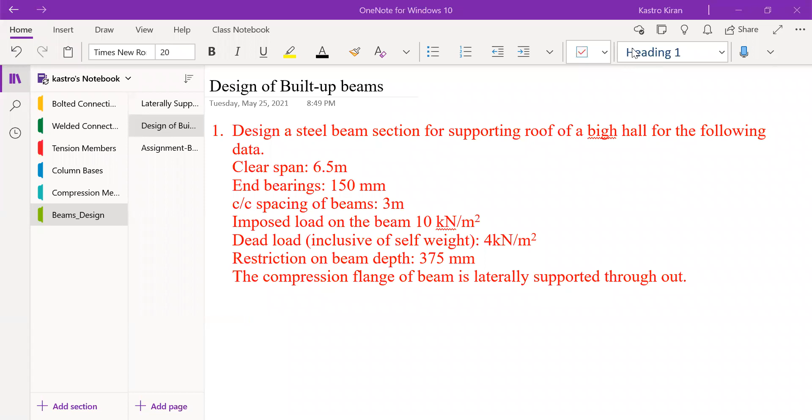So in today's class, we'll be talking about the design of built-up beams. So you all are aware of what is a built-up beam. A built-up beam is a beam.

Suppose you have a general rolled steel I section, and if you want to increase the strength carrying capacity of the same section, you provide certain plates on the top and at the bottom, depending upon the requirement. So depending upon the requirement, you place the plates on the top, at the bottom, or on both sides of the flanges. That kind of section is called a built-up section. So this is one of the cases where you can use built-up sections.

The other case of using built-up sections is when the depth of the beam is restricted. Suppose you should not make the depth of the beam more than 500 mm, let us consider this example. If the depth of the beam should not exceed 500 mm, then within that 500 mm depth only, you have to make sure the given I section carries enough load. These are the two possible cases where you can use built-up sections.

The first case is if you want to additionally ensure the safety of the member by providing plates on the top flange and bottom flange, you use built-up sections. Whereas the second case is if the depth of the beam is restricted. If in the question, or in a real-time scenario, someone says you have to design a steel beam but the depth should not exceed 500 mm, then you also ensure the safety of the member by providing built-up sections. So these are the two possible cases where you can use built-up sections.

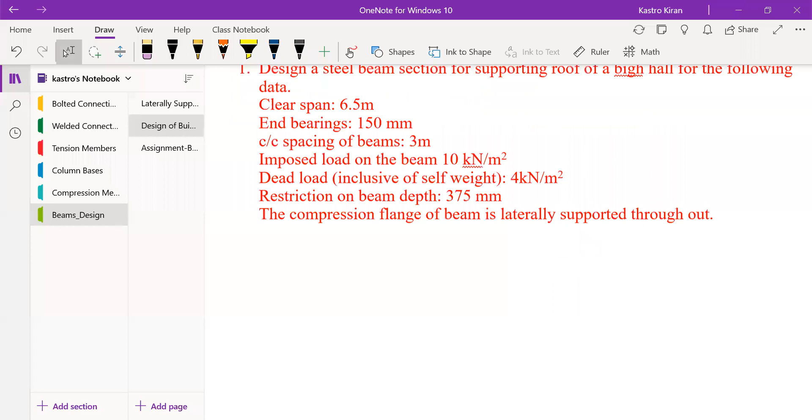Let us see how to design a built-up section when the first or second case is given. The design procedure doesn't change, but the pattern of solving will change in one step. Anyway, let's look at this first model problem on design of built-up sections or built-up beams.

The question goes this way: design a steel beam section for supporting the roof of a big hall for the following data. They have clearly given the clear span as 6.5 meters, the end bearing width as 150 mm, the center to center spacing of beams as 3 meters, the imposed load on the beam as 10 kilonewtons per square meter, and dead load, inclusive of self-weight, as 4 kilonewtons per square meter.

And here you can see the restriction on beam depth. If you are designing a beam, the total height should not exceed 375 mm, so it must be less than 375 mm. That's the condition. So the restriction on beam depth means you have an I section.

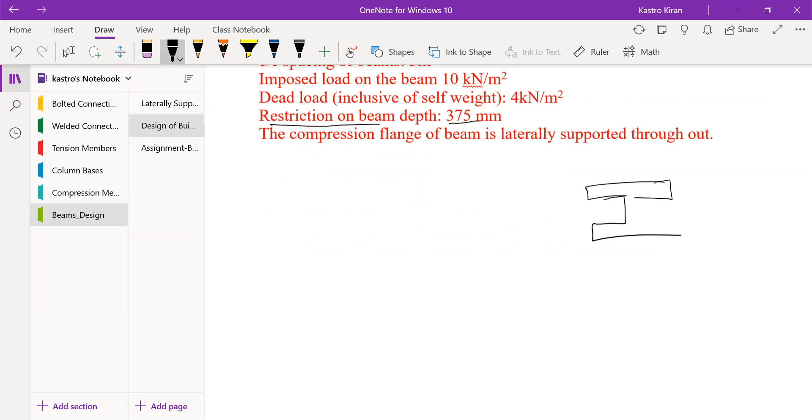When you are selecting an I section based on the ZPZ value, remember the section you select based on ZPZ should not... suppose, for example, you are selecting ISWB, and let's say you got the ZPZ value as some X value. You found that among ISWB sections, this X ZPZ value occurs at, say, ISWB 400. ISWB 400 represents a ZPZ value greater than X.

But what is the condition saying? The condition says you should not select the depth or height of the beam greater than 375 mm. That means, here you are selecting ISWB 400, which satisfies the ZPZ condition, but the condition says the beam depth or total height should not be greater than 375 mm. So you are not supposed to select this section. You are supposed to select a section with a depth less than 375 mm. That means you can go for ISWB 350 or ISWB 300.

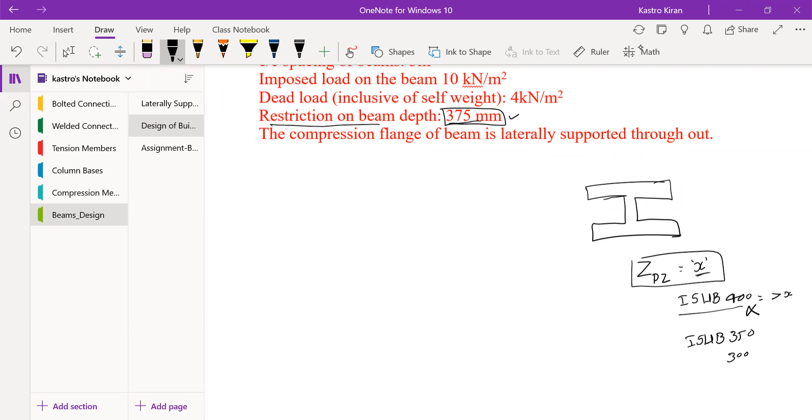Likewise, now you have another pattern of solving this problem. This is just a rough idea of how to solve this kind of problem.

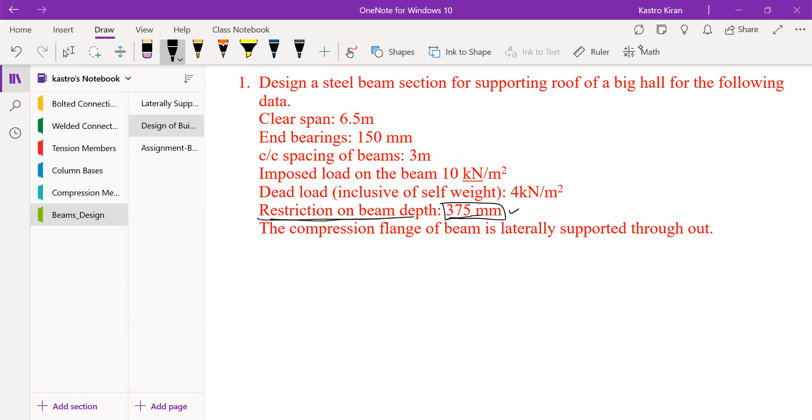If you observe the question very clearly, they did not mention anywhere that you should design a built-up beam. Instead, they have given a condition which directly indicates the design of a built-up section or built-up beam. So there's no compulsory rule that they will always say design a built-up beam section. They can come in an indirect way of asking you to design a built-up beam.

So if you find this kind of pattern in the exam, that is the restriction of beam depth, or the depth of the beam is restricted to so and so value, then that means it's a built-up beam. How to solve this, I'll let you know.

So this is the data which they have provided, and here it is also a laterally supported beam. We know we have been talking about two types of beams: laterally supported beam and laterally unsupported beam. Laterally supported beam is also called laterally restrained beam, and laterally unsupported beam is called laterally unrestrained beam. We have been talking about only this model of problem since it is limited to your curriculum.

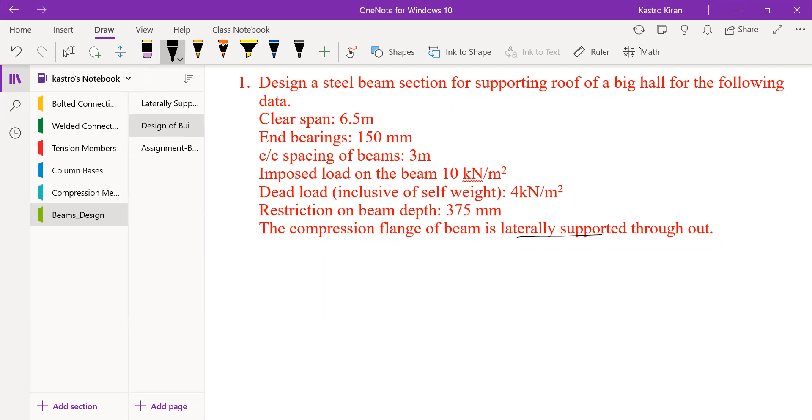So let's solve this problem, the design of built-up beams. Before solving, let's write the given data, and then we'll go for the solving process.

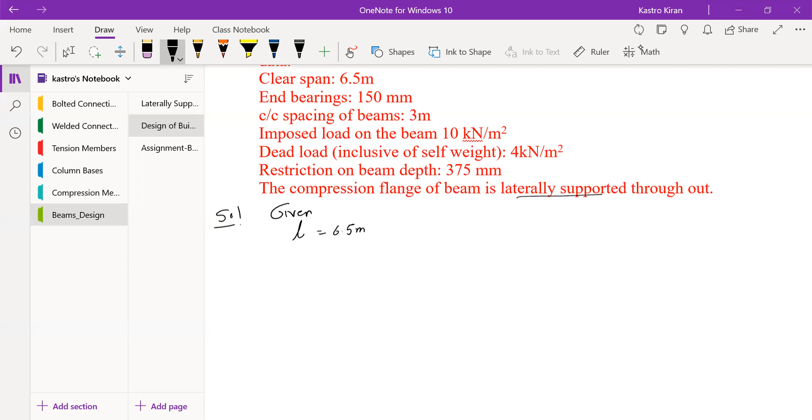Given, the clear span is L equals to 6.5 meters. Remember, here it is a clear span, not the effective span. And they have also given the end bearings width. So what is the width of end bearings?

It is 150 mm, and imposed load on the beam is also given, which is 10 kilonewtons per square meter. Remember, imposed load is also called live load. Don't confuse here. Imposed load on the beam is 10 kilonewtons per square meter.

And the dead load is also given, which is inclusive of self weight. Remember, we solved one problem earlier where they said exclusive of self weight. At that time, you assumed certain self weight, that is 1.037, and then multiplied with factor of safety and added to the total load. But since they have said very clearly that it is inclusive of self weight, you don't need to assume the self weight of the beam. Remember that condition.

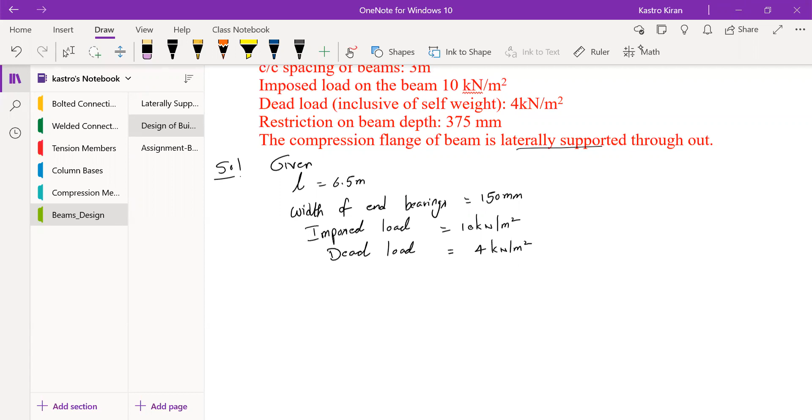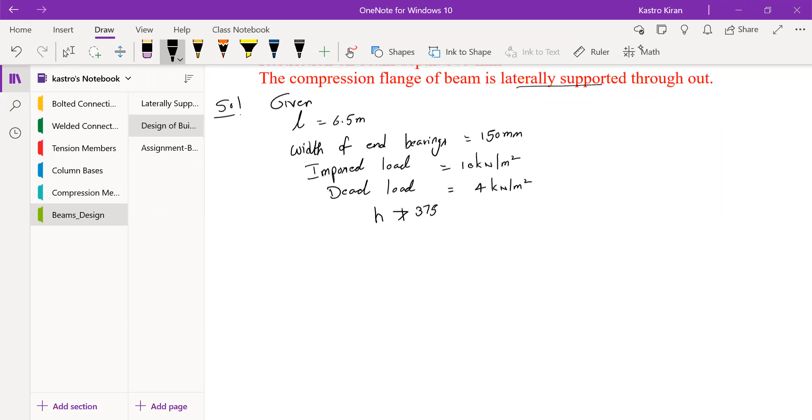So anyway, the restriction of beam depth is 375 mm, that is the depth or height of the beam - they both represent the same. The height of the beam should not be greater than 375 mm. This is also one of the conditions which they have specified.

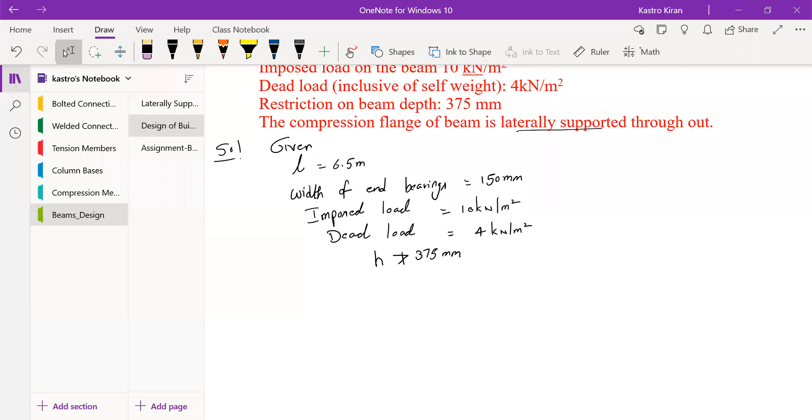Right now, let's find out the solving process. Here also you're going to find out the bending moment and shear force as the first step, and then the Zpz value. By using the Zpz value, you're going to select a section. All these conditions will follow. Anyway, let's start with the problem.

So the first step, you can keep the heading as the factored loads and effective span. Keep the subheading as factored loads and effective span. Why are we specifically calculating factored loads and effective span?

Because they have said only the imposed load, this is not a factored load. 10 kilonewtons per square meter is not a factored load, and 4 kilonewtons per square meter is also not a factored load. So you have to multiply with 1.5, and then you're going to get the factored dead load and factored imposed load. Again, here they have said only the clear span is given in the question, that is 6.5 meters. So you have to find out the effective span as well. So let's come one by one.

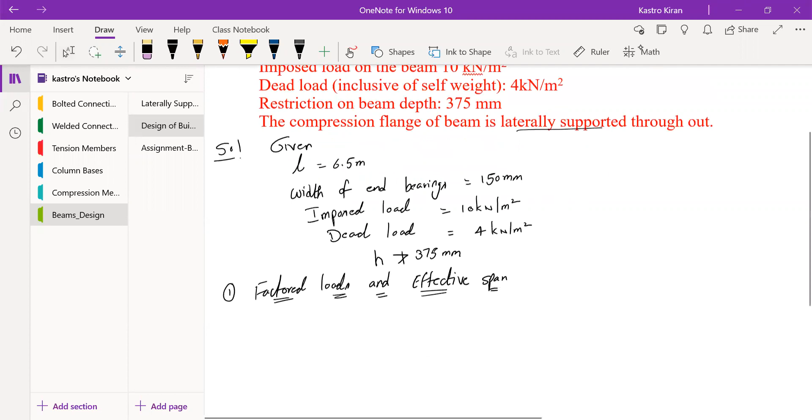So let's write the factored imposed load. Factored imposed load equals to 1.5 times of imposed load. What is the imposed load? It is 10 kilonewtons per square meter. So it will be 15 kilonewtons per square meter.

And you also have to calculate the factored dead load. Factored dead load, which is again a multiplication of 1.5 times of 4, where 4 is the dead load given in the question. So this will be 6 kilonewtons per square meter.

6 kilonewtons per square meter.

Now here you have to calculate the effective span of the beam. So how do you calculate the effective span of the beam? Let's find out this one.

Effective span is denoted as L effective or L suffix EFF. Effective span is taken in such a way that clear span - if you remember the concepts of RCC, structural engineering 1, you must have calculated the effective span - clear span plus width of wall.

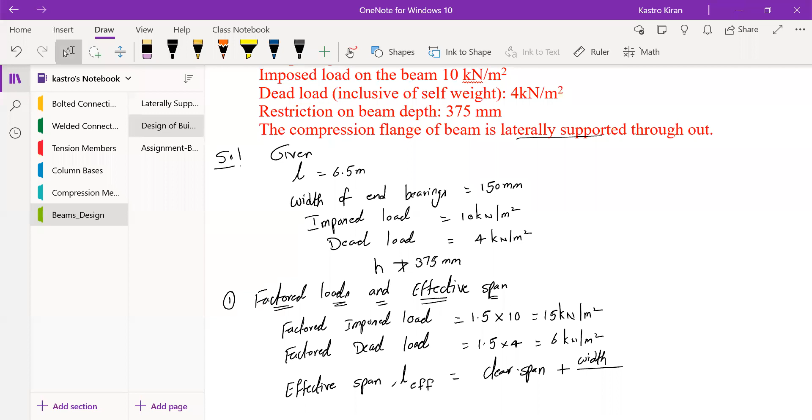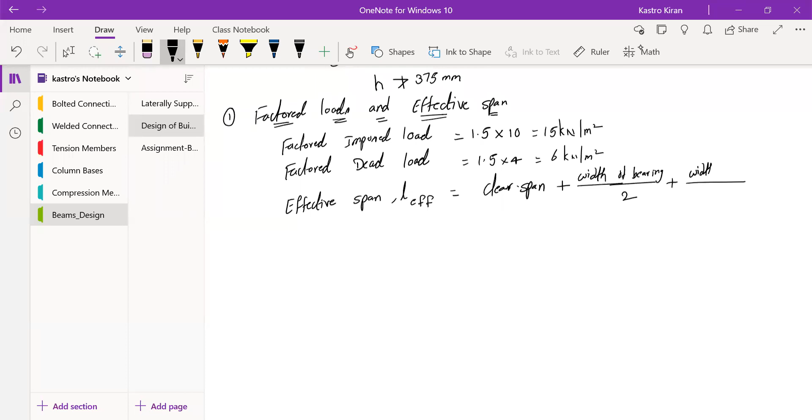Here they haven't said width of wall, but instead width of end bearings. So you can make it as width of bearing divided by 2 plus width of bearing divided by 2. How does this come in?

You have a beam supported on end bearing walls or end bearing supports, and they have set the clear span, not the effective span. Remember, clear span is the length between inner distances - this is the distance I have mentioned. So the clear span length is 6.5 meters. Inner to inner distance is called clear span, whereas center to center distance is called effective span.

So this is the effective span, L effective. So this one we have to find out. How will you find out this effective span?

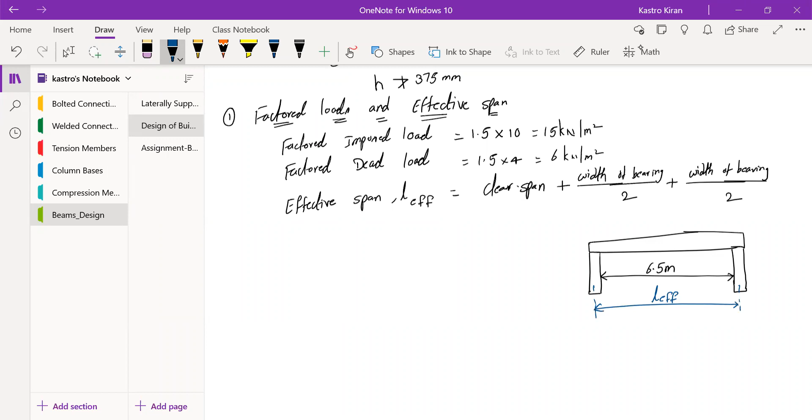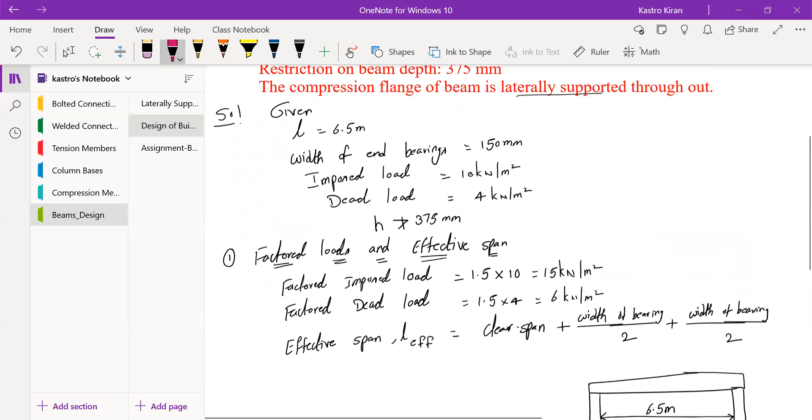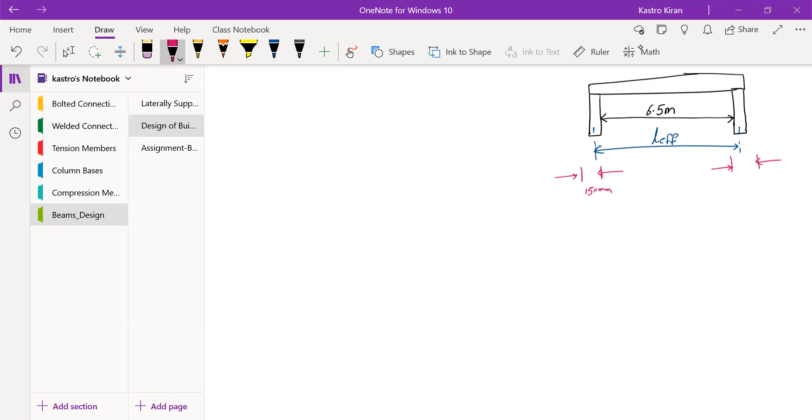It can be found out by the width of end bearing walls, which is 150 mm. Along this side you have 150 mm width of wall, and along the other side also you have 150 mm end bearing walls. So that's the formula I have written: width of the end bearing wall divided by 2 plus clear span plus width of end bearing wall divided by 2.

You must be aware of this thing. So L effective equals to - what is the clear span? It is 6.5 meters. Converting into mm, that will be 6,500 plus width of bearing divided by 2, that is 150, 150 divided by 2, plus width of bearing divided by 2 for the other side, so therefore 150 divided by 2.

If you solve for this one, you will get the answer as 6.65 meters. This is the effective span of the beam, which is measured from center to center distance of the section. That's how you calculate the effective span.

Now let's find out in the next step the bending moment and shear forces.

Bending moment and shear force. You know the formula for bending moment and shear force for a simply supported beam which is carrying a uniformly distributed load.

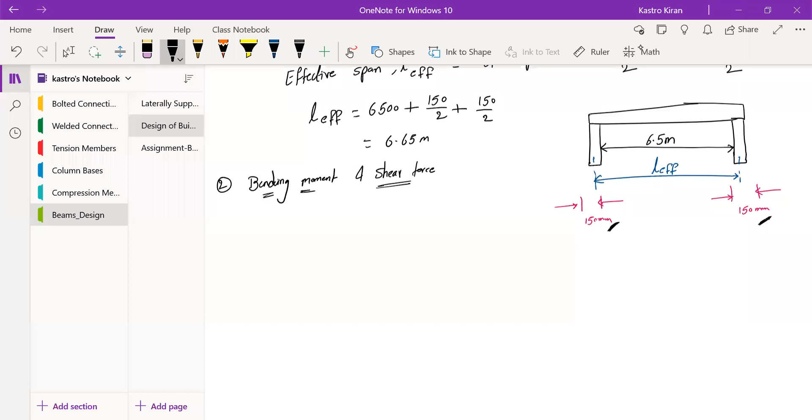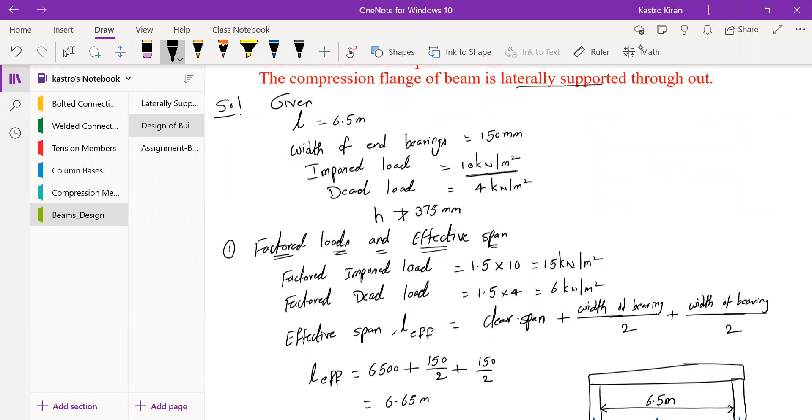How are you saying that it's a uniformly distributed load? They have very clearly said 10 kilonewtons per square meter. When they mention per square meter run, it means it's a uniformly distributed load. Also they haven't said it's a point load, so that's the reason why I'm taking it as a uniformly distributed load.

Therefore, the maximum bending moment, M max, for a simply supported beam carrying UDL is WL square by 8. This is the maximum bending moment for a simply supported beam carrying uniformly distributed load.

Now here, what is this W? W is the weight or the load which is acting on the member. How do you calculate this W? This has a separate process of calculating how to find out this one.

Please concentrate very carefully here. You have the factored imposed load as 15 kilonewtons per square meter and a factored dead load as 6 kilonewtons per square meter. You have two factored loads: one is factored imposed load, which is factored live load, and factored dead load, which is 6 kilonewtons per square meter.

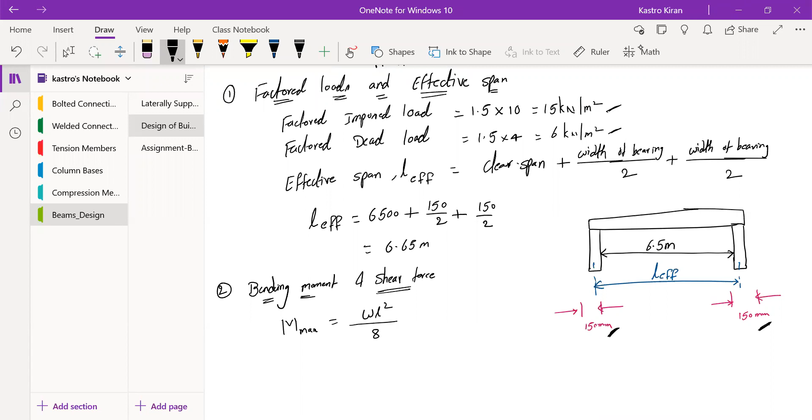Now, what is the center to center spacing of the beams? If you look at the center to center spacing of the beams, it is 3 meters. Remember it is the 3 meters, which is the center to center spacing of the beams.

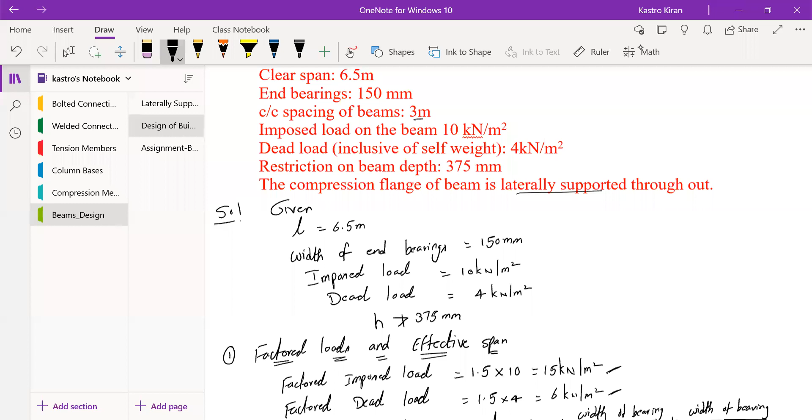Now, how will you find out the total uniformly distributed load which is acting on the 3 meters span beam? I'll repeat the statement: you have to find individually the live load and individually the dead load. Now you need the combination of the loads - a combination of dead load and live load will be the total uniformly distributed load.

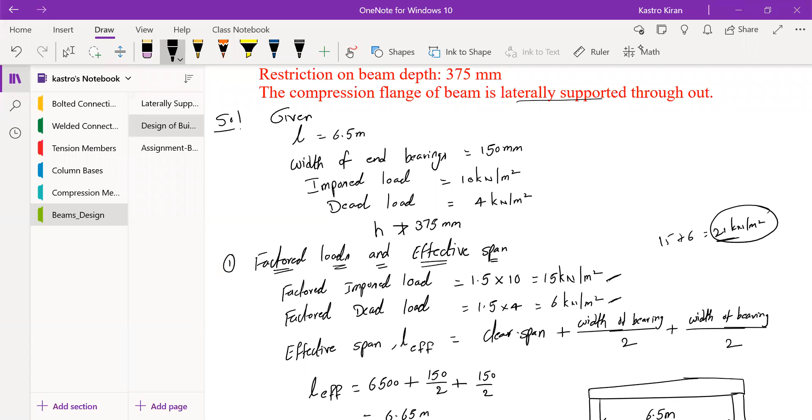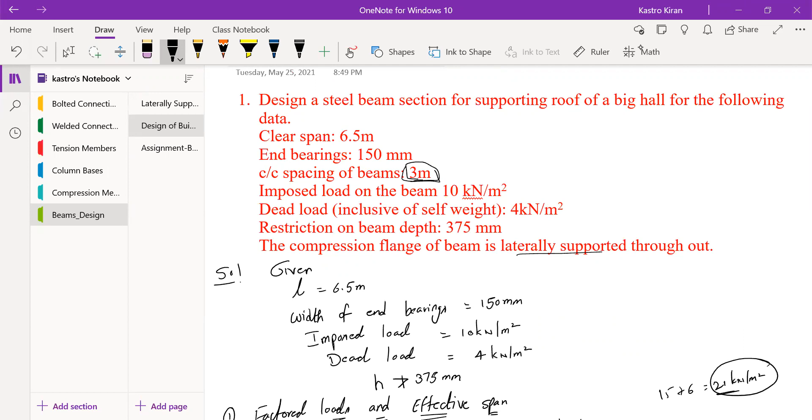Now, if you add just 15 plus 6, that will be 21 kilonewtons per square meter. Remember, this is not the total uniformly distributed load. You have to find out this 21 kilonewtons per square meter of load is acting throughout a span of 3 meters of beam. So the length of the beam, or the center to center spacing of the beam, is 3 meters. You have to find out on 3 meters length of the beam how much total uniformly distributed load is acting. I hope the concept is clear.

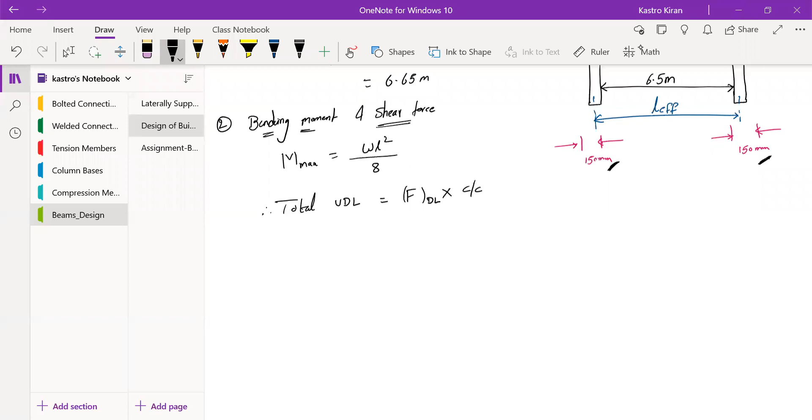So how will you find out this one? Total uniformly distributed load, UDL, equals to factored dead load into center to center spacing of the beam, plus factored imposed load or live load into center to center spacing of the beam. This is the process of how to find out the total uniformly distributed load acting on the member. Remember this process of solving.

So the factored dead load is 6 kilonewtons per square meter, and center to center spacing of the beams is 3 meters. Factored imposed load is 15 kilonewtons per square meter, and the center to center spacing is 3 meters. If you solve for this, it will be 63 kilonewtons per meter. This is the amount of UDL load which is acting on the total span of the beam, that is 3 meter span of the beam.

Remember, this will be the value of W. 63 kilonewtons per meter is the value of W. Don't add just simply 15 plus 6, that will give you 21 kilonewtons per square meter. That is not the total uniformly distributed load. You have to calculate it for per meter length of the beam. So in order to calculate what is the uniformly distributed load acting per meter length of the beam, this is how you have to solve.

Anyways, let's solve for maximum bending moment, that is M max equals to W L square by 8. So W is 63, and L square, where L is the effective span. Remember, don't take it as a clear span, it is the effective span. So it will be 6.65 square divided by 8, which will give you 348.25 kilonewton meter. So this is the maximum bending moment.

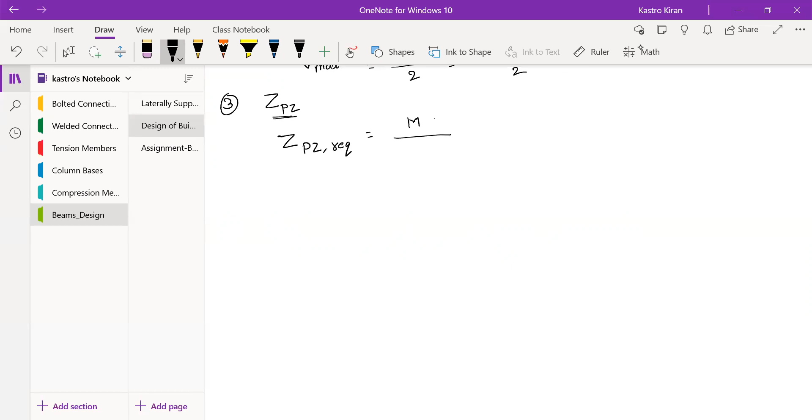ZPZ required equals to, the formula which we have been solving in the last two problems, that is M into gamma M naught by Fy. You know the maximum bending moment, which is M, that is 348.25. So 348.25 into 10 power 6, into gamma M naught value is 1.1, and the value of Fy is 250. If you solve for this, you will be getting 1532.3 into 10 cube mm cube. So this is the ZPZ value required for our section.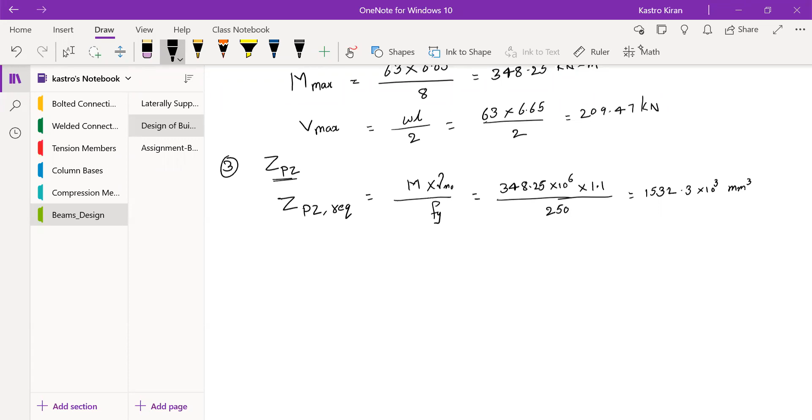Now what you have to do is open IS 800 code book and find out a section which has a ZPZ value greater than or equal to 1532.3 into 10 cube mm cube. Let's just go for this one initially. Open annexure H of IS 800 2007. Don't remember the condition of depth of the beam being restricted to 375, don't go for that one. Just open annexure H of IS 800 2007 and find out a steel section or steel beam which has a ZPZ value greater than 1532. Let me know what that section is.

So this will be the preference order: ISWB will be the first preference, second preference will be ISMB, and third preference will be ISLB. So you are saying that ISWB 450 is having a ZPZ value greater than 1532. Can you tell me what is the ZPZ value of ISWB 450? 1760 into 10 cube mm cube.

Now, what you have to remember is they have very clearly said that one condition is the depth of the beam should not exceed 375 mm. So what is the depth of the beam which you have selected? It is 450 mm. So the condition is not getting satisfied.

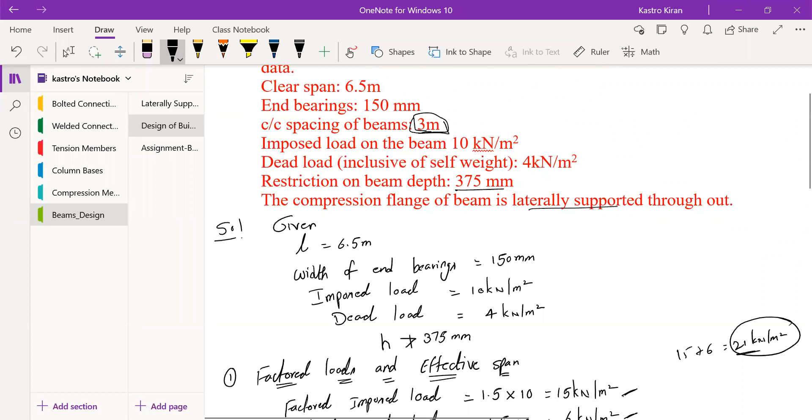Suppose, for example, if this condition is not given in the question, then you can directly select ISWB 450 and solve the problem with the process we have solved. But here they have set a condition that you should not select a section which has a depth greater than 375 mm, so you cannot select this section. Even though the ZPZ value is greater than 1532, you should not select this section because the depth of the beam is exceeding 375 mm. 450 is actually greater than 375 mm, so you should not go for this section.

Now, how to look for another section? You have to look for a section with depth less than 375 mm, so you don't need to worry about the 1532 value anymore. If you refer to IS 800, Annexure H of IS 800 2007, you don't find any section ISWB 375. You'll find the section ISWB 350 or ISWB 300. You don't find a 375 section, right? Am I right? Can someone confirm? Yes sir. So you don't find ISWB 375.

So since you don't have a section with ISWB 375, you cannot select this one either. The next possible options are either ISWB 350 or ISWB 300. But let's not go for ISWB 300, because you obviously know that both ISWB 350 and 300 will have the value of ZPZ less than 1532. I'll repeat: if you select ISWB 350 or ISWB 300, both sections will have the ZPZ value less than the required value, that is 1532.3.

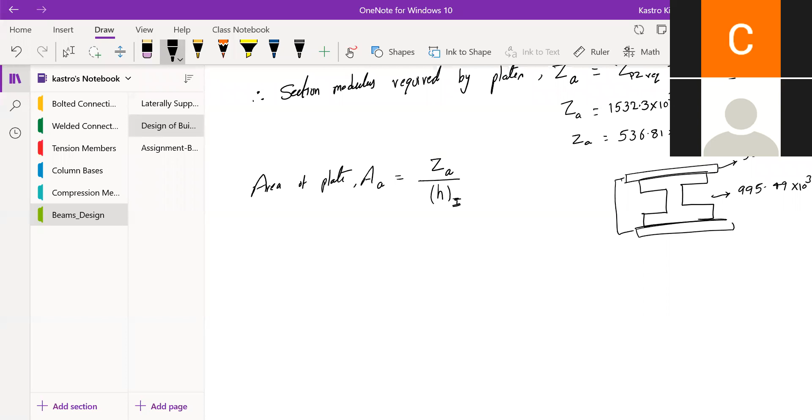So now you got to know the ZP value or the ZA of the plates, which is 536.81 into 10 cube. Now you need to find out what will be the area of the plate. Let's find out area of plate, you can make it as A capital, which is area, and small a represents plate. How will you find out this area of the plate? It can be found out as ZA, that is section modulus of plate, divided by total height of the I section which you have selected.

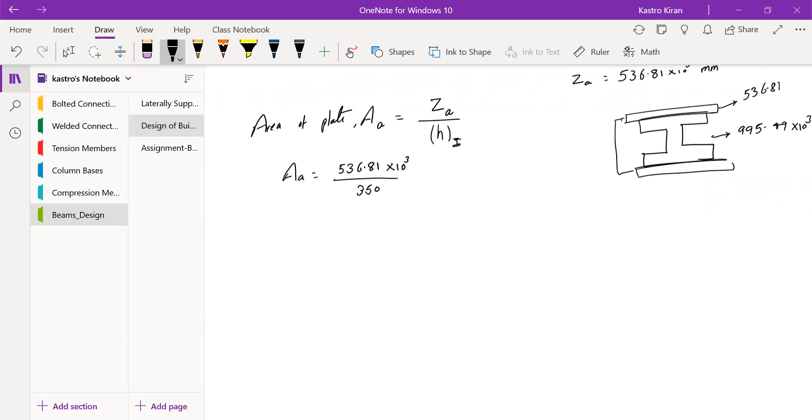This can be calculated as AA equals to area of the plate, where plastic section modulus of plate is 536.81 into 10 cube, and the total height of the section which you have selected is 350, it is ISWB 350, that means the height value is 350. So this will be 1533.74 square. This is the area of the plate.

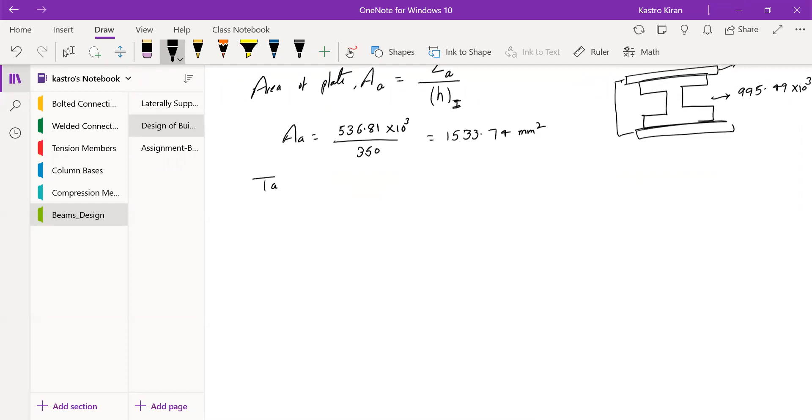Now you need to find out the width of the plate as well as thickness of the plate. How will you find out the width of the plate? Take width of the plate, or cover plate, or flat - anything is same. Take width of the flange cover plate. What would be the width of the flange cover plate? It should be equal to the flange width of the section, or width of the flange of I section.

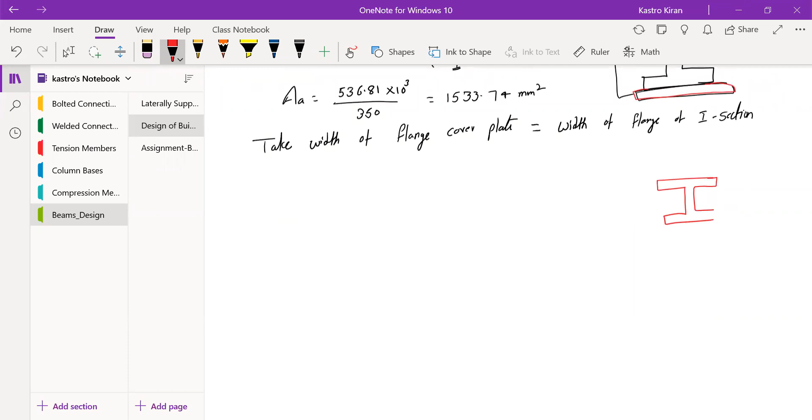Width of flange of I section - remember, in this diagram I have made it with certain difference just to make sure that you are providing the plate. But as far as the code book is concerned, the flange width should be equal to the width of the plate which you have selected. They both must be same. So that's what I have written here: take width of the flange cover plate equals to width of flange of I section.

What is the width of the flange of I section? If you refer the steel tables book on the properties of ISWB 350, you'll be getting the width of the flange, and the same width of the flange has to be provided as the width of the flange cover plate. Can you tell me what is the width of the flange cover plate? Can you refer 200? Is it 200? Can you tell what is the flange width of I section, that is ISWB 350?

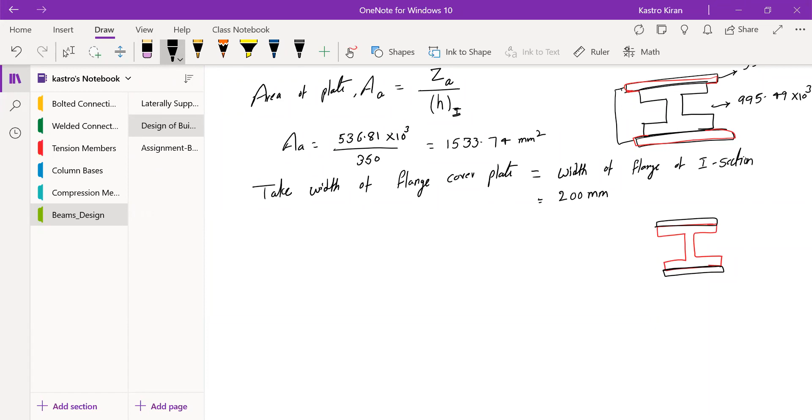200, sir. Okay, fine. Thank you. So therefore, the width of flange cover plate will also be 200 mm, which is the width of flange of the I section. That's how you find out the width of the flange cover plate.

Now you need to find out the thickness of the flange cover plate, which you can call TFP. These are just representations, you don't need to bother much about it. How will you find out the thickness? It will be area of plate upon width of the flange. You know area equals width into thickness, but you need thickness, so it will be area divided by width.

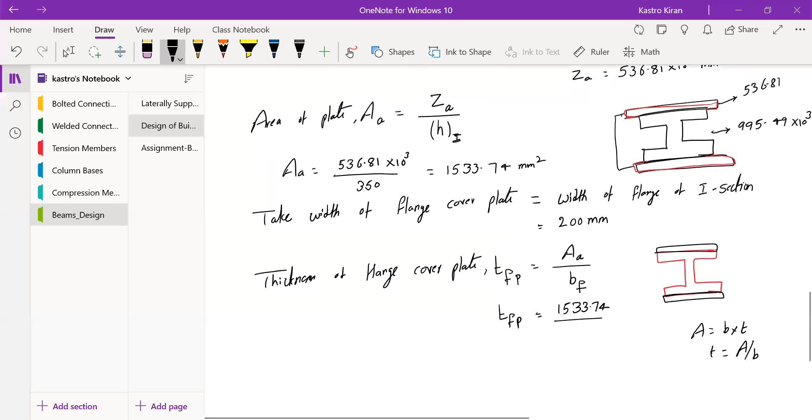So therefore thickness of the flange cover plate equals the area of the plates, which is 1533.74, upon the width of the flange, which is 200. If you solve this, you'll be getting 7.66 mm.

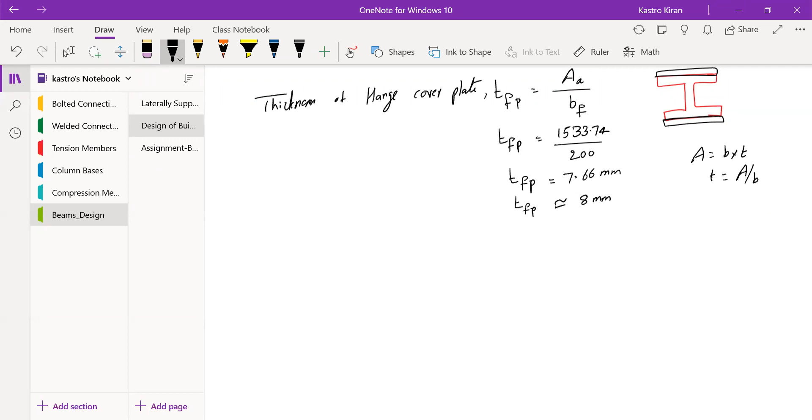So therefore you can make the thickness of the flange cover plates 8 mm approximately. You can also go for 10 mm, that's up to you. So these will be the dimensions of the cover plates which you have provided: the thickness of the flange cover plate is 8 mm and the width of the flange cover plate is 200 mm. So therefore provide cover plate of size 200 by 8 mm. This will be the cover plate dimensions.

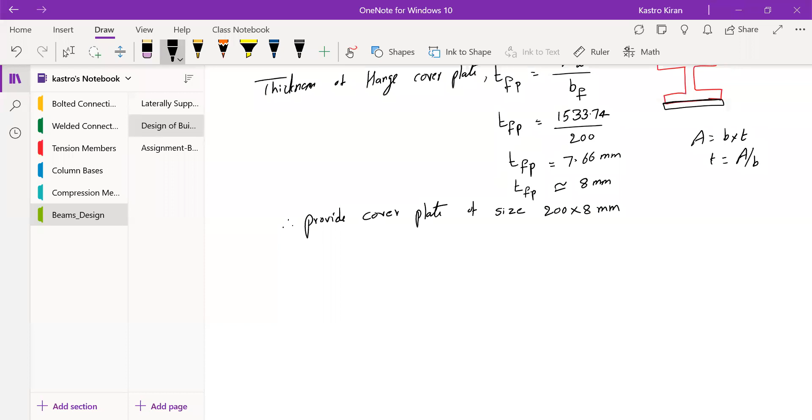Now you have to find out the ZPZ provided value. So far you know the ZPZ required value, which is 1532. But the ZPZ you have provided is divided into two parts: one is the ZPZ of the I section and the second is the ZPZ of the plates. You add these two to get the ZPZ provided. Remember, this total ZPZ provided value must be greater than 1532. That's a condition. Let's find out that one.

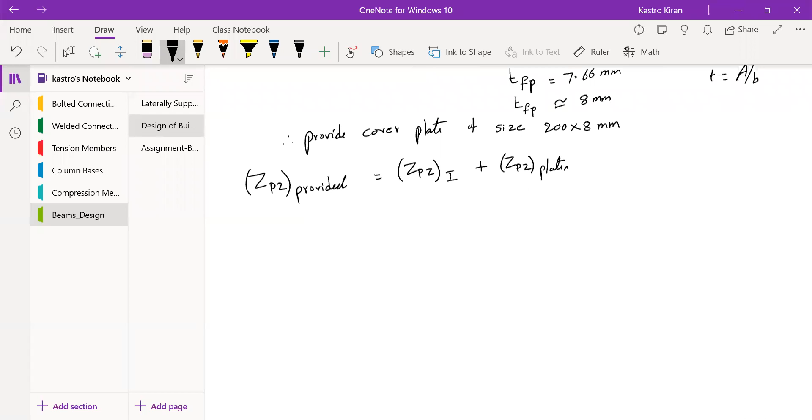So ZPZ provided equals ZPZ of I section plus ZPZ of plates. You know the ZPZ of the I section, which is 995.49 into 10 cube. Now how will you find out the ZPZ of plates? You find it this way: area of the plate into height of the I section into thickness of the plate. This is a fixed formula.

So let's look at this value. 995.49 into 10 cube plus the area of the plate. How will you find the area of the plate? Multiply width into thickness, that is 200 into 8, which gives the area of the plates. So 200 into 8 into height of the I section, which is 350, and the thickness of the plate is 8 mm. If you solve this, you'll get the ZPZ provided value as 1568.29 into 10 cube mm cube.

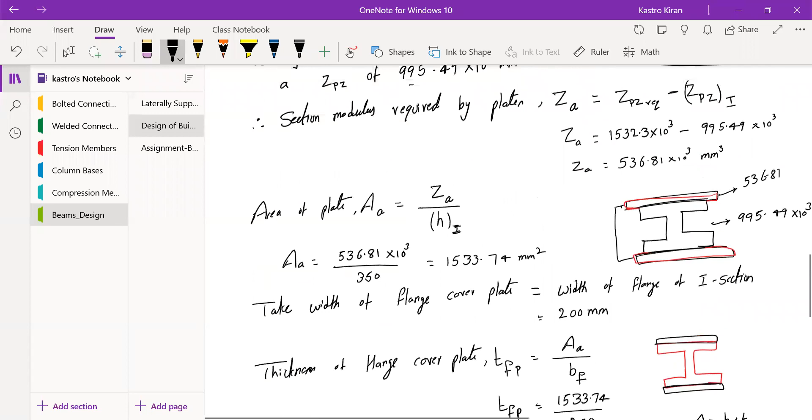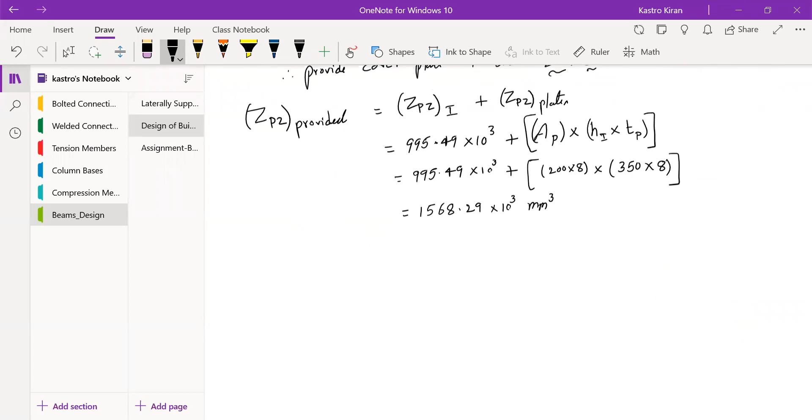I said here the condition: the ZPZ of I section and the plates must be greater than 1532. The value you got is 1568, which is greater than 1532.3 into 10 cube mm cube. That means it's a safe condition. So if this condition is satisfying, then only the dimensions of the cover plates you have provided are safe. Remember, this condition must get satisfied.

Suppose, for example, instead of 1568, you got the value as 1528.29 into 10 cube mm cube, just an example. This 1528 is actually less than 1532.3 into 10 cube mm cube, which means it's an unsafe condition. Now what will you do here if the case is unsafe? You have to increase the dimensions of the plate.

Okay, you can increase either the thickness value or the width value, or you can increase both the values at an appropriate range. Ensure that the ZPZ provided value must be greater than the ZPZ required value. If the condition is satisfying, then there is no problem.

If the condition is not satisfying, then you increase the dimensions of the plate. Don't go for increasing the ZPZ value of the I section. Don't change any of these I section properties, keep the I section same. The only parameter you have to change is the area of the plates, that is the size of the plates, both width and thickness.

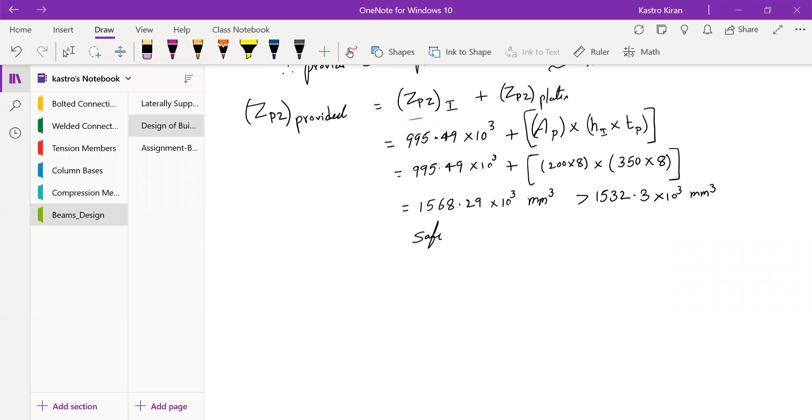Anyways, here they have also said that the total depth of the section should not exceed 375 mm. Now we have to check for this condition also, whether the total depth of the section which you have provided is greater than 375 or less than 375. We have to ensure for that. So let's check that also.

So, total depth of beam section. What will be the total depth of the beam section? It is depth of the I section, or the height of the I section, plus 2 times the thickness of plates. Why is it coming like this? You have the I section, and you know the total depth of the I section, which is h, that is 350 mm.

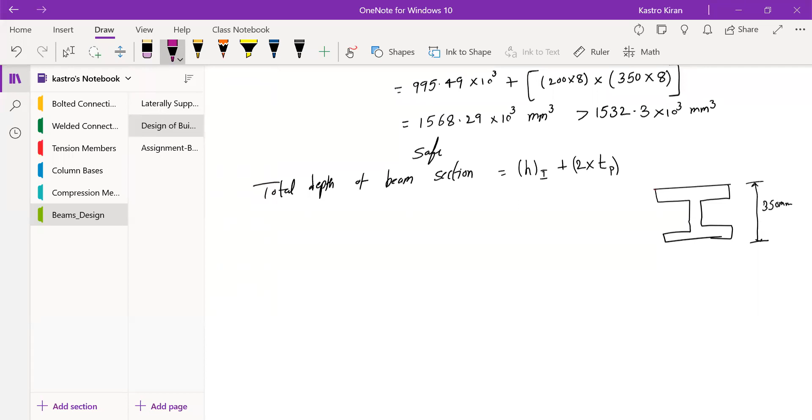And here you are providing the cover plates on the top flange as well as on the bottom flange. Now what is the thickness of the cover plate on the top and the bottom? It is 8 mm. So therefore the value will be: height of the I section is 350, plus 2 times the thickness of plates, that is the thickness of the plate on top and thickness of the plate at the bottom, which is 8 mm each. So if you solve this, 350 plus 2 times of 8 will give you 366 mm.

How much should be the depth of the I section? It should not exceed 375 mm. That's what the condition said - the depth of the beam should not exceed 375 mm. So is it exceeding or not? It is not exceeding. 366 is less than 375 mm. That means we have provided the total depth of the section less than 375 mm, which is what the condition said. So therefore, as far as depth of the section is concerned, it is also the safest section.

So that's how the entire process of selecting the section and checking whether the ZPZ values and the total depths are in the safe condition or not. From the next step onwards, the process remains the same. You have to find out the section classification, then check for shear capacity, check for high shear or low shear, and then check for deflection. These parameters don't change.

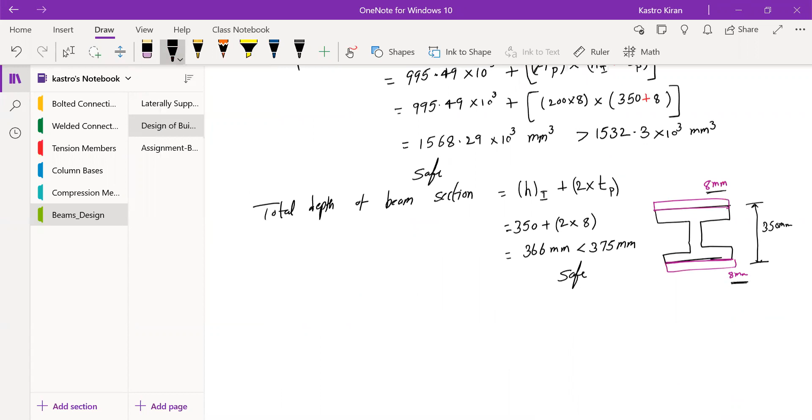Fine then. So the total depth of the beam section is also solved. Now let's write the sectional properties of ISWB 350.

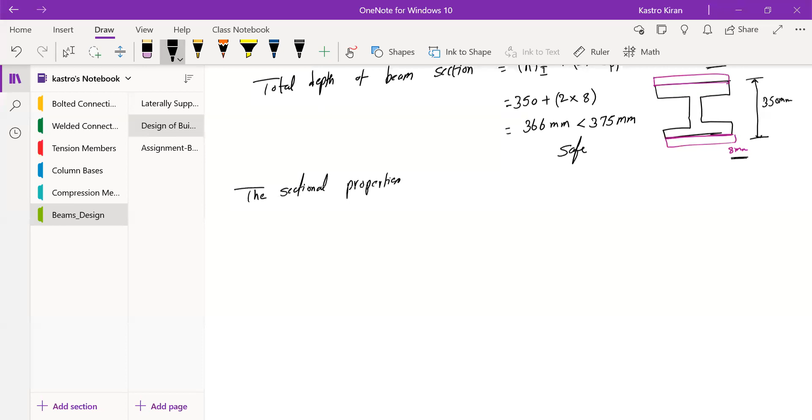The sectional properties of ISWB 350 at the rate 558.19 Newton per meter. Let's write all the sectional properties. One is the depth of the I section, which is 350 mm, and the width of the flange, which is 200 mm. Please check your steel tables book, you will get all these properties. Thickness of the flange equals 11.4 mm, and thickness of web equals 8 mm.

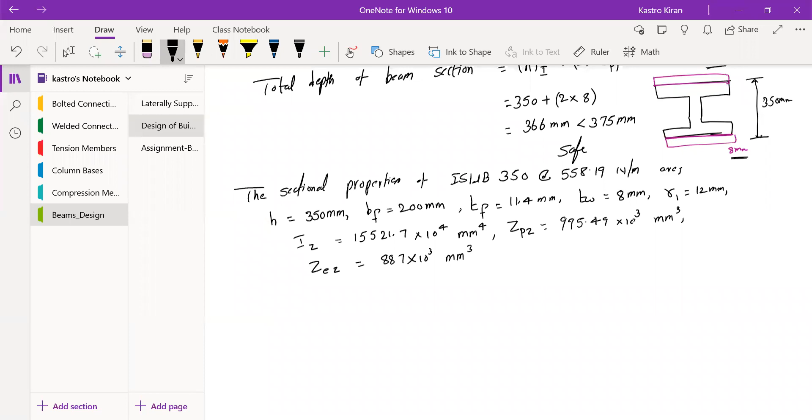The radius at root R1 equals 12 mm, and the moment of inertia along ZZ axis equals 15521.7 into 10 power 4 mm power 4. The ZPZ value, which is plastic section modulus, is 995.49 into 10 cube mm cube, and the ZEZ value, which is the elastic section modulus, is 887 into 10 cube mm cube. So these are the sectional properties of the ISWB 350.

Okay, so now let's solve for the next step, that is the fourth step.

So the fourth step is section classification. From here on, you should try to solve on your own. I'll solve it, but please try solving on your own also. The same process, so how will you find out? It will be B by TF.

This condition must be followed, which must be less than 9.4 epsilon. And you have to find out another section, D by TW, which must be less than 84 epsilon. Remember, the epsilon value is 1. You know the formula, right? This is obtained from table 2 of IS 800 2007. I don't write the Codal book values again and again, you can refer the previous problem.

Anyways, so B value is taken as half of the width of the flange. That is, width of the flange is 200 upon 2, which will be 100 mm. So therefore B by TF equals 100 divided by the thickness of the flange, 11.4, which is 8.77, which is less than 9.4.

And you have another condition, which is D by TW. Now how will you calculate the D value? It is the height of the I section minus 2 times thickness of the flange, minus 2 times radius at root. So D equals height of the I section, 350, minus 2 times thickness of the flange, 11.4, minus 2 times of radius at root, what is radius at root?

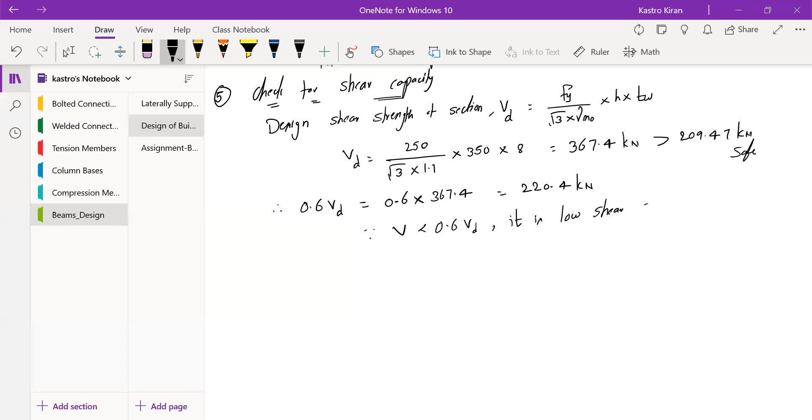So here 0.6 VD is greater than V, capital V, or you can say V is less than 0.6 VD. Since V is less than 0.6 VD, you know the condition, which is for low shear case. So if V is less than 0.6 VD, it is low shear case. So when it is low shear case, the next step has to be solved for check for design bending strength.

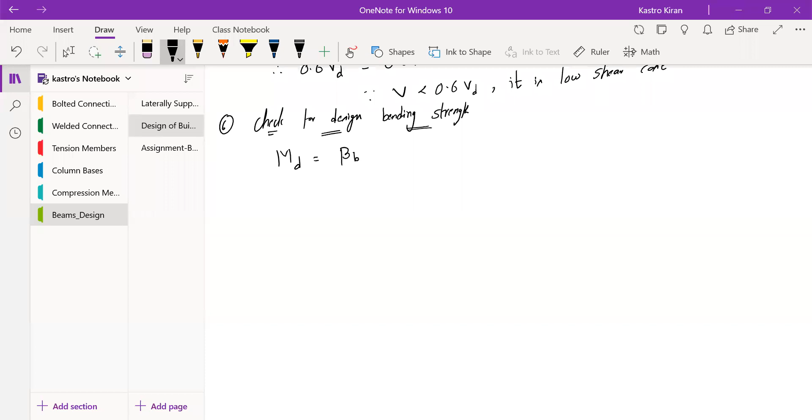Check for design bending strength. So how do you solve for design bending strength when it is for low shear case? You know the formula, that is MD equals to beta B into ZPZ into Fy by gamma m naught.

So what is beta B value? If it is a plastic section, the value of beta B is 1. And what is the ZPZ value? Here, the ZPZ value is the ZPZ of I section and the ZPZ of the plates, the combination of these two. So this value you have to take, that is 1568.29. Remember, don't directly take the value of ZPZ of I section. It is not just I section, you also have plates for the section.

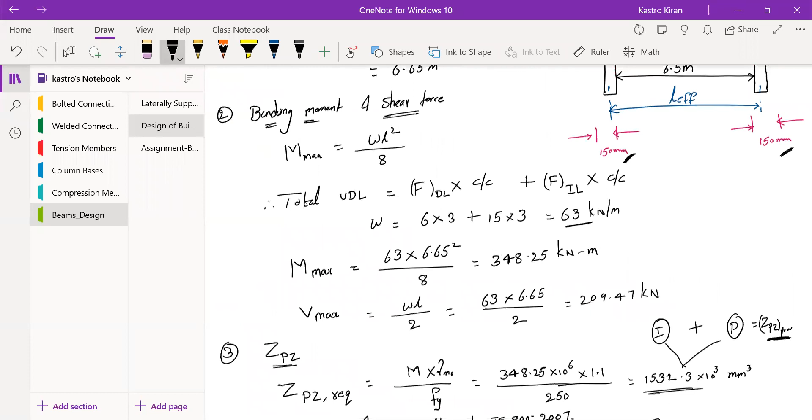So therefore the value of ZPZ is 1568.29. 1 into 1568.29 into 10 cube into Fy value is 250 upon gamma m naught is 1.1. If you solve for this, you will be getting the answer as 356.43 kilonewton meter. And here the value of MD is greater than M. What is the M value? It is the maximum bending moment. If you check down, the maximum bending moment is 348.25 kilonewton meter.

So since MD is greater than M, it is also in safe condition. Anyways, so now here MD should also be less than or equals to this condition, if it is a simply supported beam: 1.2 into Ze into Fy by gamma m naught. Remember this condition we have solved.

So I'll just go through the previous problem and I'll show you how we have solved this one. Here you can see 1.2 into Ze into Fy by gamma m naught. Whatever the MD value you have calculated here, it must be less than this value also. So let's also write that value: 1.2 into Ze into Fy by gamma m naught.

So you check for this condition. However, it will be in the safe limits only, there are no issues. You can check for this one and it will be in safe only. So since it will be in safe condition, I'm not checking it again and again, but still you can give it a try.

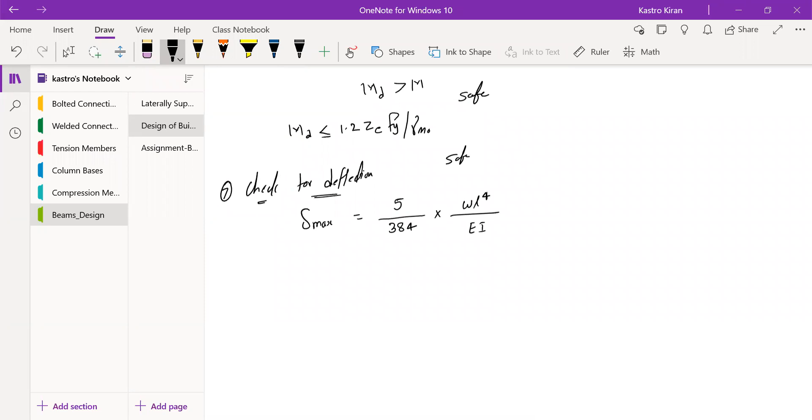So the next step is check for deflection. Now, how will you find out the check for deflection condition? You know the maximum deflection value, delta max equals to, it's a simply supported beam carrying UDL load. What is the formula for maximum deflection? It is 5 by 384 into WL power 4 by EI. So you know all the values.

But here the value of W has to be focused very carefully. So which value of W has to be taken now? That's the key thing. Here, if you check down, the value of W is the summation of the total dead load and the total live load, which is 63 kilonewtons per meter, which is the total UDL load. So remember, in built up sections, the condition of W, that is 63 kilonewtons per meter, should not be taken directly.

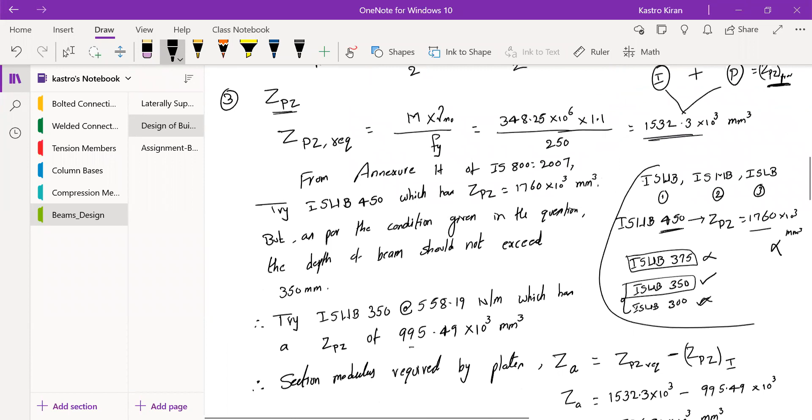In built up sections, what you have to take is, this is the factored uniformly distributed load. But what you have to provide is the working load. So W should be the working load here in built up sections. So remember this condition, W should be the working load. You have the factored load.

What is the factored load? It is 63 kilonewtons. So in order to find out the working load, how will you find out? It is the factored load upon 1.5, right? This formula is coming from: factored load equals to working load into 1.5, that is the factor of safety. So from this, you are just cross multiplying and finding out the value of working load. So therefore, working load equals to 63 kilonewtons per meter, divided by 1.5, which will be 42 kilonewtons per meter.

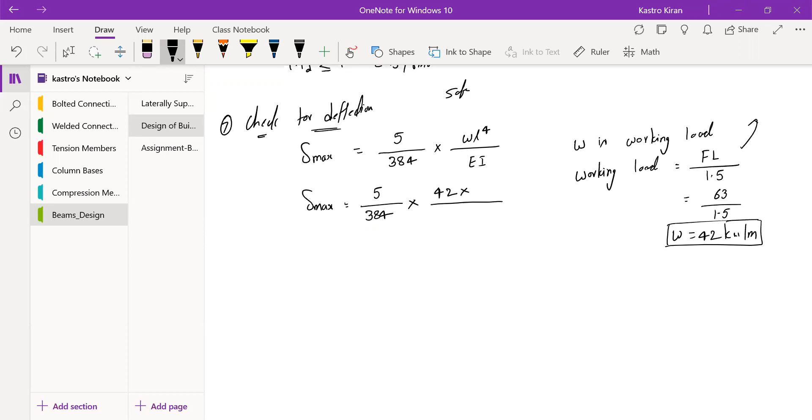Remember, this should be the value of W. When you are finding out delta max, the value of W has to be very carefully checked. Don't directly take it as 63, it must be divided by 1.5 in order to make it as a service load or the working load. So that must be clear for all of you. So it will be delta max equals to 5 by 384 into W, which is 42, into L. Here, remember, L is the effective span, don't take it as the clear span distance. So here you have two spans: one is the effective span, which is 6.65 meters, and the clear span, which is 6.5 meters.

Okay, so the effective span is 6.65 meters and the cleared span is 6.5 meters. It is not the effective span which you have to consider, it is the clear span which you have to consider in the design of built-up sections. I made a mistake while telling that it must be the effective span. It should be the clear span, which will be 6,500.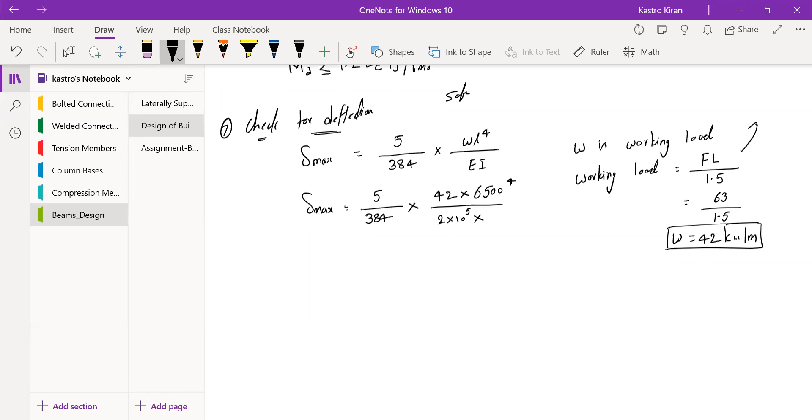Power 4 upon the Young's modulus value is taken as 2 into 10 power 5 into IZZ. Okay, IZZ, it is not just the IZZ of the I section alone. It should be the IZZ of the plates and also IZZ of the I section. So you must know that I value provided. Have you solved for that one?

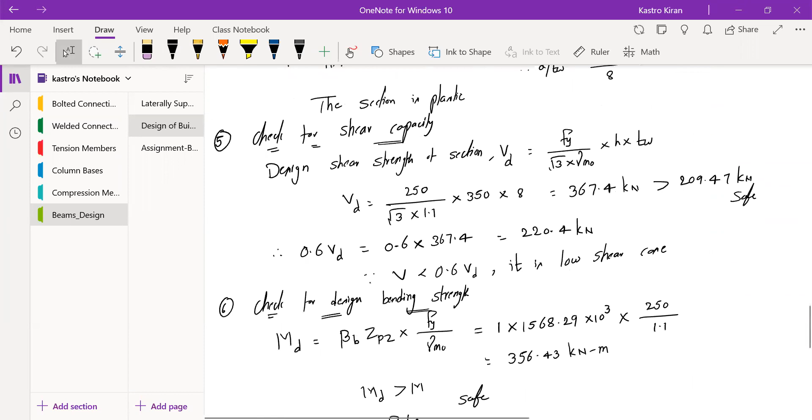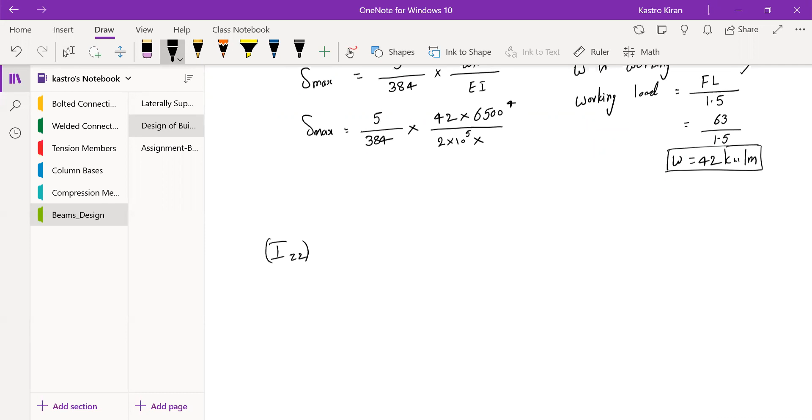We haven't solved for moment of inertia of both the things. Anyways, I'll just solve it here. IZZ total, please make this one also. IZZ total equals to IZZ of I section plus IZZ of plates. So we had to solve for this in the previous step only, I forgot this one. Anyways, let's solve for this one. You must have an idea about finding IZZ of I section with IZZ of plates. Can you solve and let me know what is the value of total moment of inertia of the entire I section, that is the built up section.

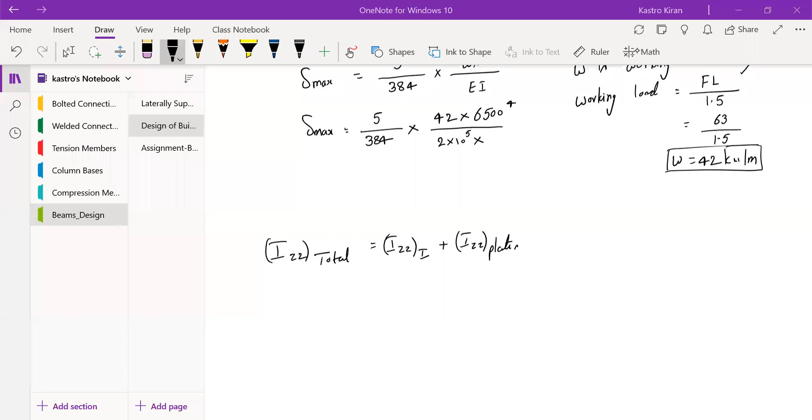I'll just try to solve. Let me know the answer because I haven't solved for this one. That is IZZ of the I section is 15521.7 into 10 power 4.

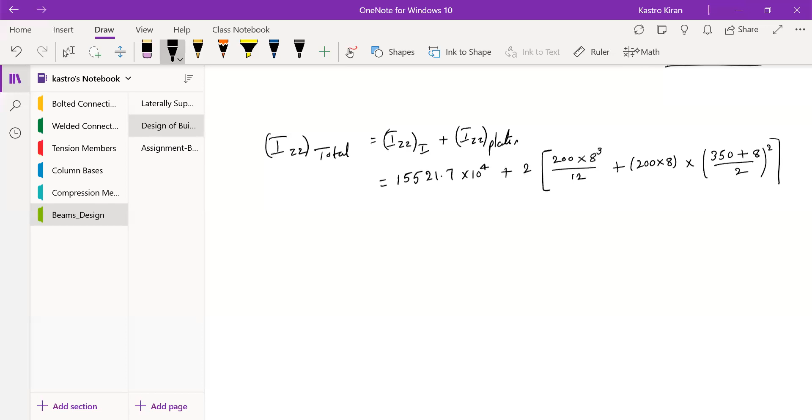And how will you find out IZZ of the plates? You have two plates, so I'm multiplying with 2 into BD cube by 12, that is width of the plate into thickness of the plate cube divided by 12, plus area of the plate, that is 200 into 8, into y bar square. So it will be height of the I section plus thickness of the plate divided by 2, whole square. This is how you can find out the value of IZZ of the plate.

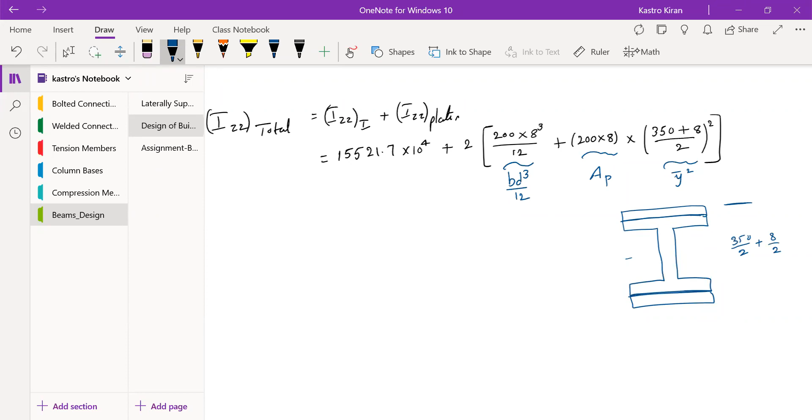So I'll write the clear statements here. It is BD cube by 12, and this is the area of the plate, and this is y bar square. How does this y bar come? I'll just write this out. So you also have the plates. Now y bar is the distance from extreme top fiber or extreme bottom fiber to center of the section. So you can find out this: the total height of the section is 350, that is 350 divided by 2 plus 8, that is the thickness of the plate divided by 2. It is not from the extreme top, it is from center.

I hope you know how to find out the value of y bar. This is how you can find out the IZZ value of the total built up section. So this will be 25776.52 into 10 power 4 mm power 4. If there is any mistake in this calculation, let me know.

So here in calculation of delta max, the value of I is taken as 25776.52 into 10 power 4. If you solve for this one, the value of delta max is obtained as 21.10 mm. So now what is the permissible deflection value? You can write this down separately, or just make sure you are calculating the value of IZZ.

Now, what is the condition for check for deflection? The delta max value must be less than the permissible deflection. What is the permissible deflection? Delta equals to L by 300. What is L? It is the clear span, that is 6,500 divided by 300, which will be 21.66 mm. So here the value of delta max is less than delta. Therefore, safe in deflection. Since delta max is less than delta, it is safe in deflection.

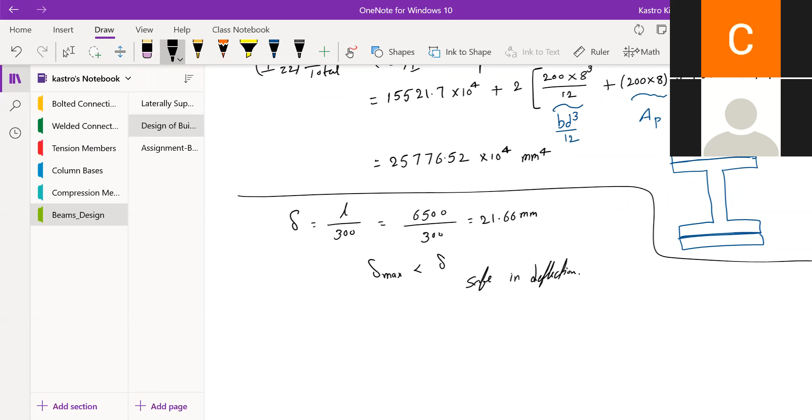So let's also find out the last step, which is check for web bearing. So the 8th step, you can make it as check for web bearing. How will you find out the check for web bearing? You know the formula, that is bearing strength or force in web, FW equals to B plus N1 into TW into Fy upon gamma m naught.

Now here you don't know the value of B, right? If you compare with the previous problem, in that one they said assume the stiff bearing length, but here they haven't said the stiff bearing length. But I have said one condition: the stiff bearing length should range between 75 to 100 mm.

Remember this condition, the stiff bearing length, that is B. So therefore assume stiff bearing length B equals to 100 mm. You can take any value between 75 to 100, that's up to you, but I'm just taking the extreme value, that is 100 mm. Now how will you find out the value of N1?

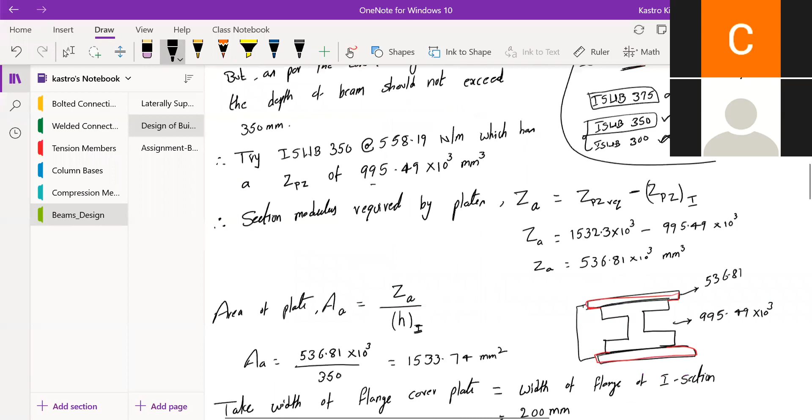Remember this value of Fw, we know the condition: the value of Fw must be greater than V, which is the maximum shear force. What is the value of V? It is 209.47... so it is 209.47, which is less than the value of Fw. So therefore, the web bearing is also in safe condition.

So this is the entire process of design of the built-up section. The only parameter which is getting changed is calculation of ZPZ and checking for the depth of the section and the I value, that is moment of inertia. I'll just give a summary note of whatever we have solved so far.

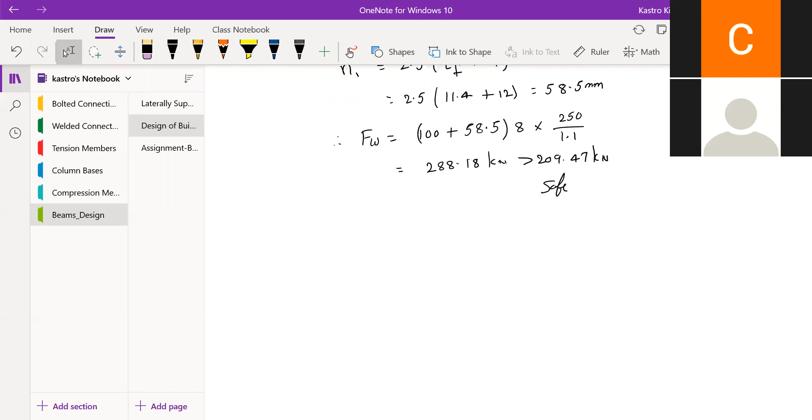Just for your understanding, I'm making the summary note. So what we solved initially is, forget about the effective span and the maximum bending moment and shear forces for a moment. Initially you found out the effective span. Since the effective span is not given, if it was given in the question, you wouldn't need to solve for this effective span condition. Anyways, the effective span was found out, and then the bending moments and shear forces were found out.

In the next step, we found out the value of ZPZ based on depth restriction. So you have a certain amount of depth which was restricted for you, and based on this, you selected the ZPZ value, and then selected a section.

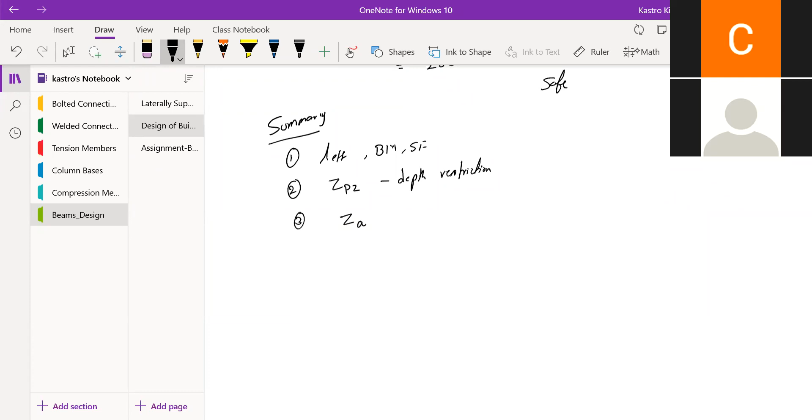In the next case, what you have done is found out the ZPZ of plates, and then found out the dimensions of the plates, that is width and thickness. The width of the plate is taken as the width of the flange, and the thickness you found out by calculation. Then the ZPZ provided value has been found out, and you must ensure that the ZPZ provided is greater than the ZPZ required, which you calculated in step 2.

As far as this condition is concerned in step 2, if it is greater than the ZPZ required value, then you considered that section, and solved for the next steps: section classification, then found out the shear strength capacities or shear strength parameters, and found out whether it is a low shear or high shear case. After finding out low shear or high shear case, you found out the value of MD, that is design bending moment or design bending strength, and then found out the value of I.

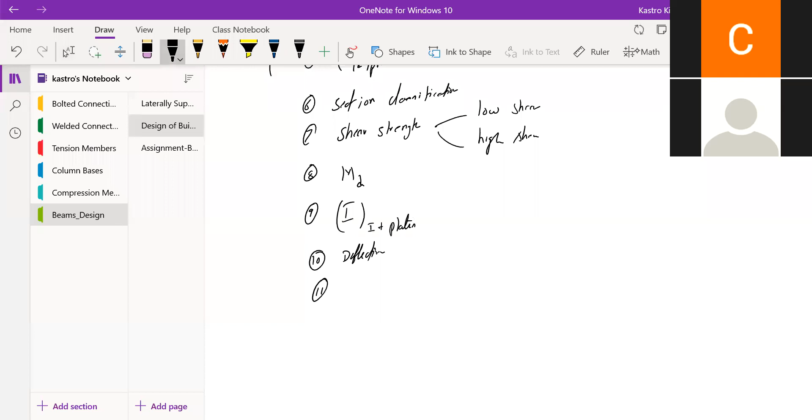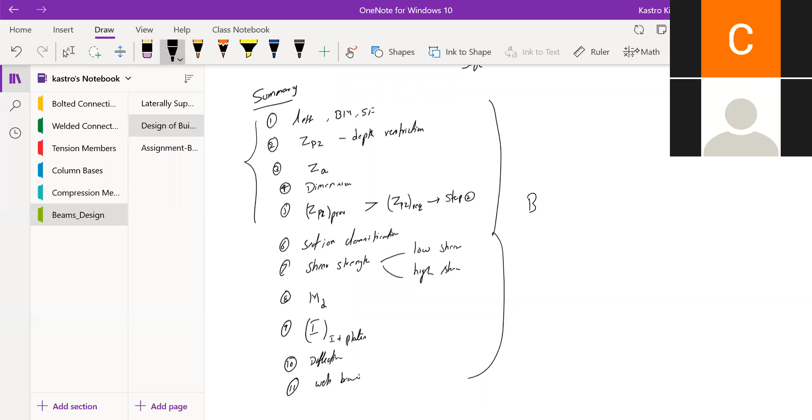The total value, you can make it as moment of inertia of the I section and plates. In the last but one step, we found out the deflection value check, and then found out the check for web bearing. So this is the entire process which we have solved so far—this is the process of designing a built-up beam, the total process of solving the design of a built-up beam.